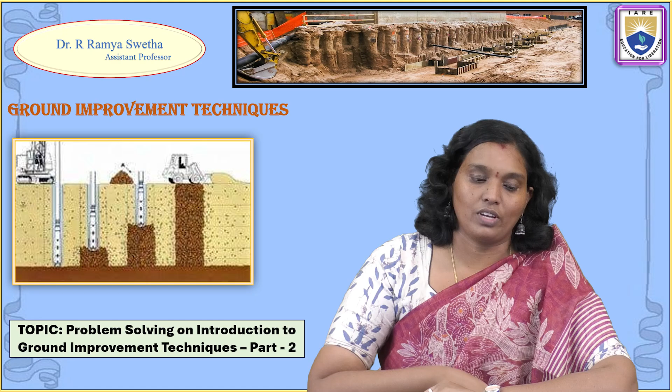Today we are going to discuss what we understood in our previous lecture about various techniques, how to understand the problem statement, and according to that, which method we choose for getting the desired soil property.

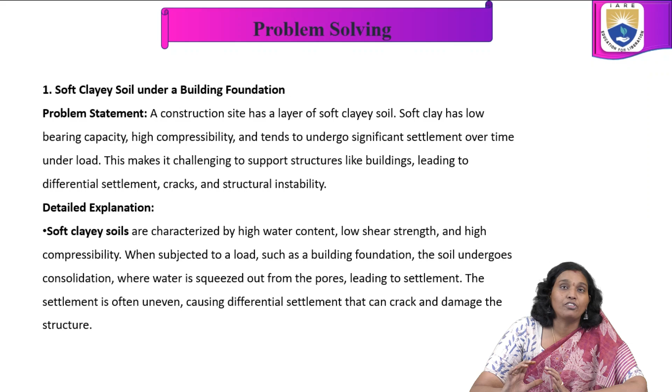In this class, we are going to understand soft clayey soil under a building foundation. The required construction work is a building foundation, and our type of soil is soft clayey soil.

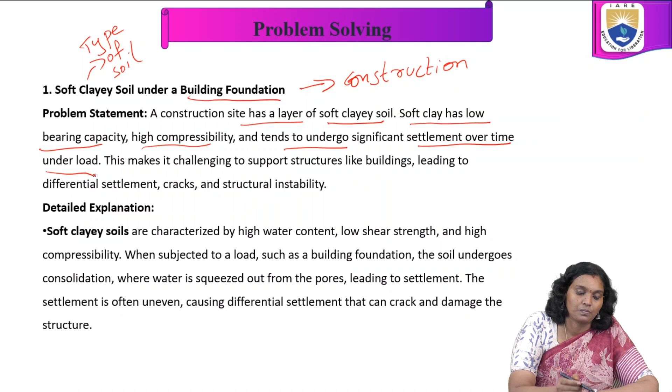The problem statement is a construction site has a layer of soft clayey soil. Soft clay has low bearing capacity, high compressibility, and tends to undergo significant settlement over time under load. This makes it challenging to support structures like buildings, leading to differential settlement, cracks, and structural instability.

Because of this nature of the soil, we are not getting the desired soil properties. In this particular condition, the desired properties are bearing capacity, compressibility, settlement, and structural stability. These are the parameters affecting the building foundation.

For getting the building foundation safe and economical, we have to choose one technique to meet the required properties: bearing capacity, high compressibility. These soils tend to show significant settlement over time under load.

So it is challenging to support structures like buildings. They lead to differential settlement, cracks and structural instability. Here we will explain in detail how to overcome those things.

Soft clayey soils are characterized by high water content, low shear strength, and high compressibility. When subjected to load such as a building foundation, the soil undergoes consolidation where water is squeezed out from the pores, leading to settlement. This settlement is often uneven, causing differential settlement that can crack and damage structures, because of the nature of the soil.

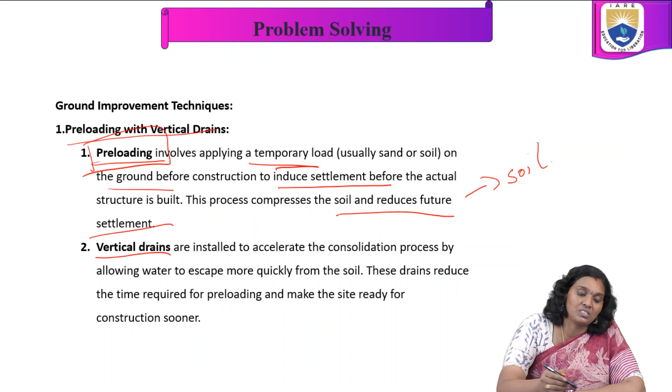This process compresses the soil and reduces future settlement. This preloading helps us reduce the further settlement of the particular soil. Because of this, we choose this preloading with vertical drains technique.

Vertical drains are installed to accelerate the consolidation process by allowing water to escape more quickly from the soil. These drains reduce the time required for preloading and make the site ready for construction sooner. Otherwise it may take a long time to get the desired property.

In that case, we choose these vertical drains to accelerate the consolidation process, allowing water to escape more quickly, so the site is ready as early as possible. Stone columns are also a technique we may choose.

In the problem statement, there are different types of problems we face which we need to rectify. According to ground improvement techniques, various options are there: one is preloading with vertical drains, and the other is stone columns.

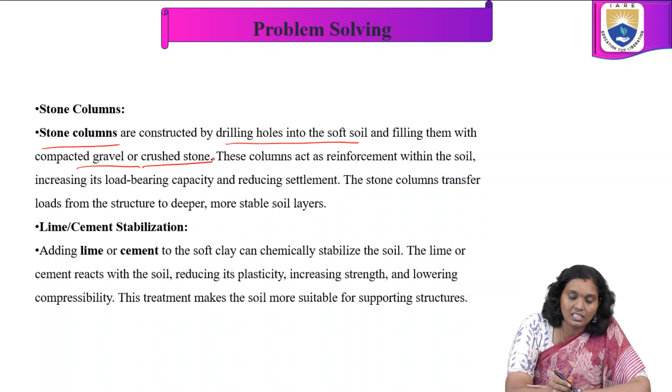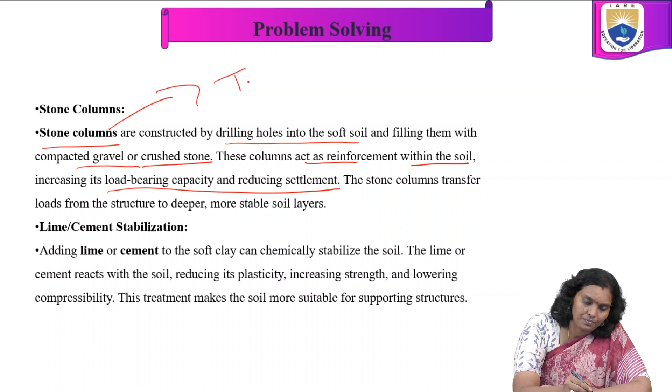Stone columns are constructed by drilling holes into the soft soil and filling them with compacted gravel or crushed stone. These columns act as reinforcement within the soil, increasing its load bearing capacity and reducing the settlement. Using this technique gets the desired properties, increasing load bearing capacity and reducing settlement.

The stone columns transfer loads from the structure to deeper, more stable soil layers.

Lime and cement stabilization is another technique which may be chosen for this kind of problem statement. Adding lime or cement depends upon the properties of the soil, how it reacts with lime and how it reacts with cement. These are the things for stabilization.

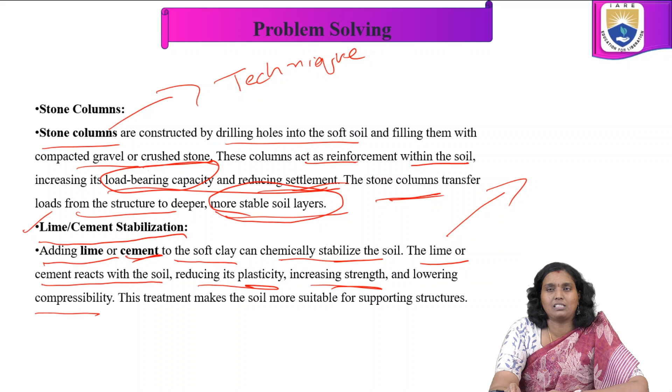So, to chemically stabilize the soft clay soil, the lime or cement reacts with the soil, reducing its plasticity, increasing strength, and lowering compressibility. Once we require these properties, we choose the lime cement stabilization technique to reduce plasticity, increase strength, and lower compressibility.

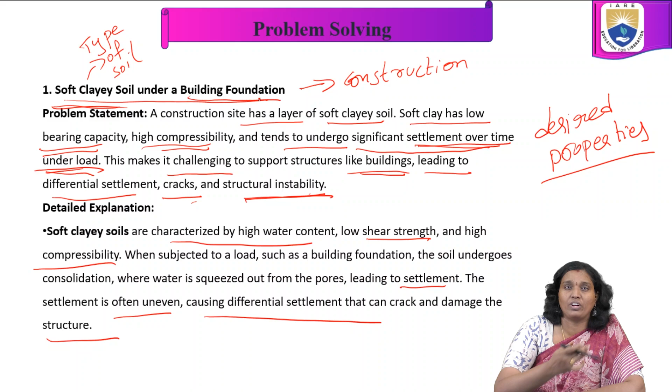So in loose sandy soil there's the issue of liquefaction. For soft clayey soil under building foundation, the available techniques are preloading with vertical drains, stone columns, and lime cement stabilization. As per the numerical analysis and desired property required, if we want reduced plasticity, we choose accordingly, as well as considering site requirement, cost, and effectiveness.

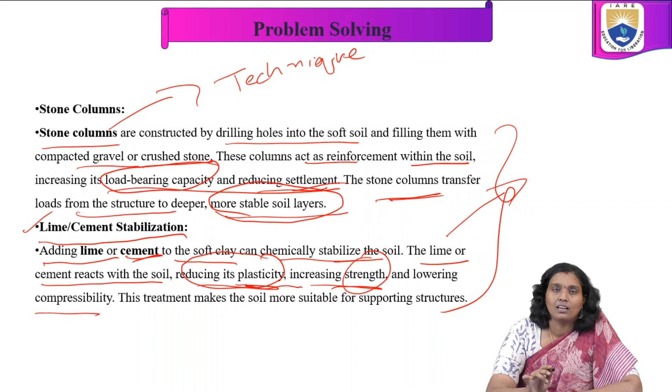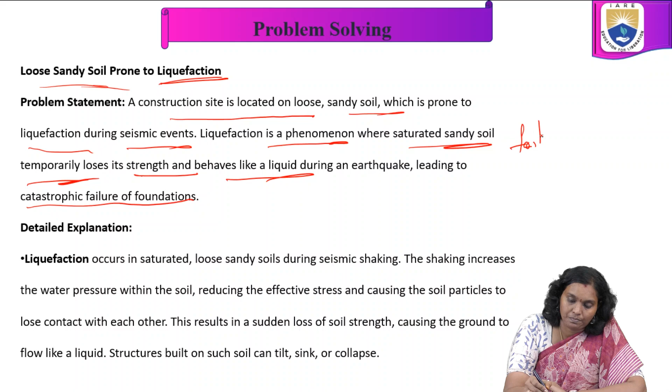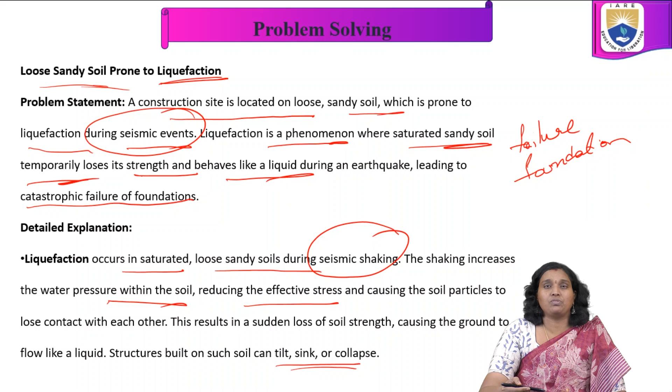So because of this liquefaction nature, we understand this occurs during seismic events. What is liquefaction? It occurs in saturated, loose and sandy soils whenever seismic shaking happens. The shaking increases the water pressure within the soil, reducing the effective stress and causing soil particles to lose contact with each other. This results in sudden loss of soil strength, causing the ground to flow like a liquid. Structures built on such soil can tilt, sink, or collapse.

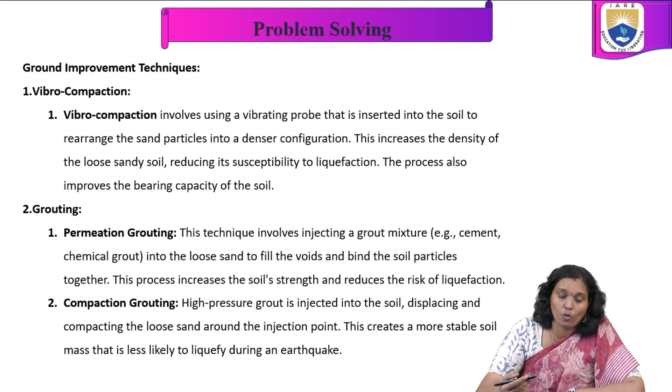So these are the issues we face for loose sandy soils whenever seismic events occur. For this, we have different techniques: vibrocompaction, grouting, and soil replacement are the methods adopted for reducing this problem. In vibrocompaction, it involves using a vibrating probe inserted into the soil to rearrange the sand particles into a denser configuration. This increases the density of the loose sandy soil, reducing its susceptibility to liquefaction.

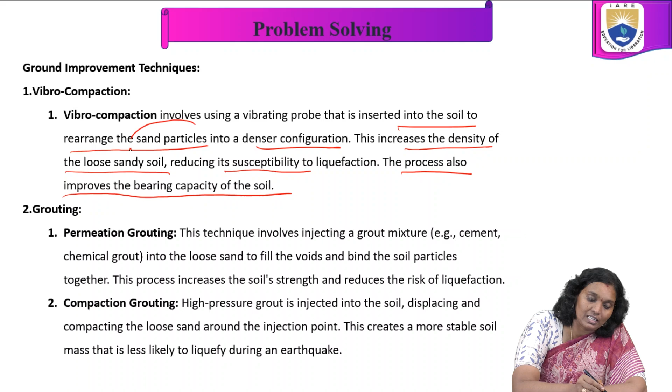So here we understand in vibrocompaction, the vibrating probe is inserted into the soil to rearrange the sand particles to get a denser configuration. This increases the density of the loose sandy soil, reducing its susceptibility to liquefaction. This process also improves the bearing capacity of the soil.

Bearing capacity. Now grouting, permeation grouting. This technique involves injecting a grout mixture, for example cement or chemical grout, into the loose sand to fill the voids and bind the soil particles together, depending on the choice of grout mixture, whether cement or some chemical grout, which we inject.

The process has different methods. According to the type of material we choose and the requirement, we select the injecting technique used into the loose sand to fill these voids and bind the soil particles together. This process increases the soil strength and reduces the risk of liquefaction.

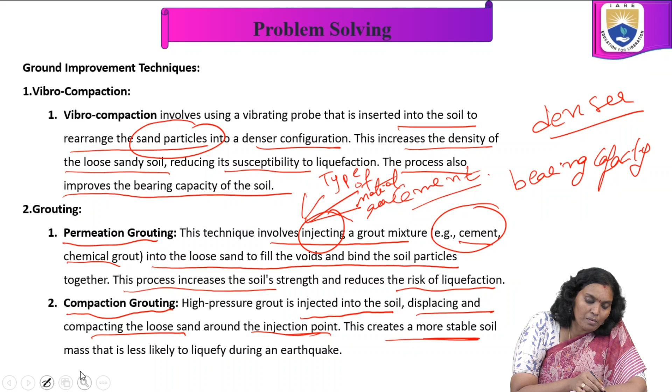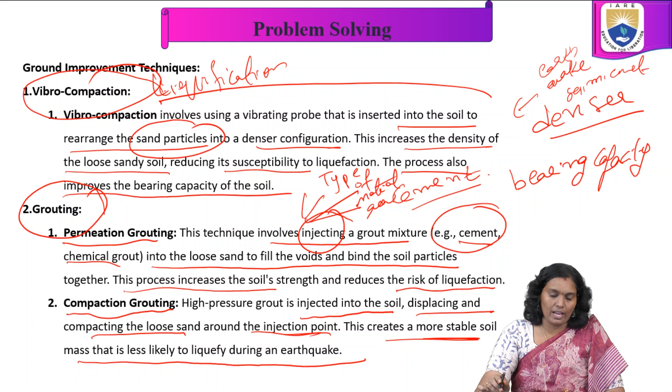Here one more is compaction grouting. In this, high pressure grout is injected into the soil, displacing and compacting the loose sand around the injection point. This creates a more stable soil mass that is less likely to liquefy during an earthquake. As per the earthquake, whenever we experience this, because of seismic events, this liquefaction may happen, so we choose vibrocompaction or grouting or other methods because a more stable soil is created during the earthquake.

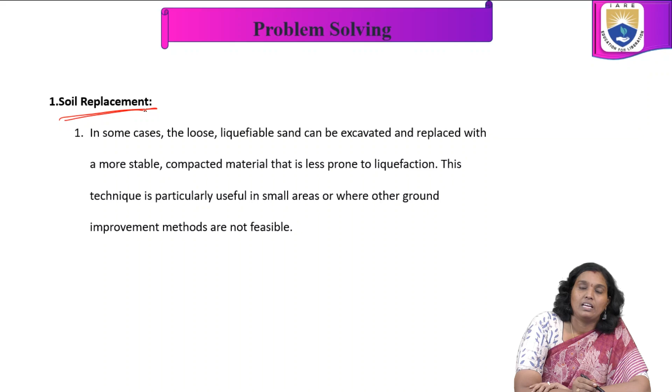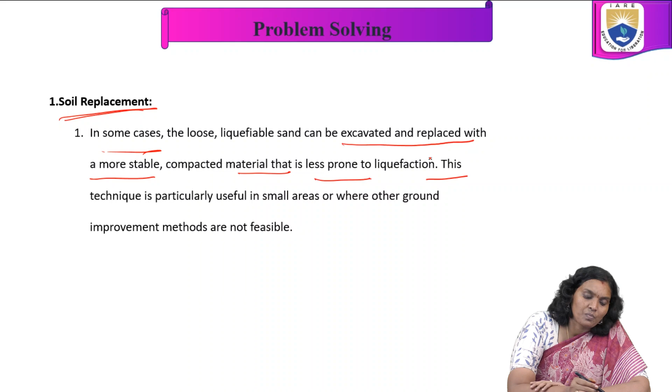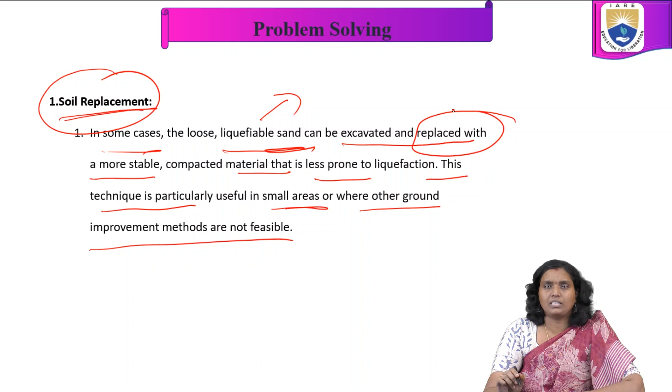Here one more method we may choose is soil replacement. In some cases, the loose liquefiable sand can be excavated and replaced with a more stable, compacted material that is less prone to liquefaction. This technique is particularly useful in small areas where other ground improvement methods are not feasible, so we replace the complete soil.

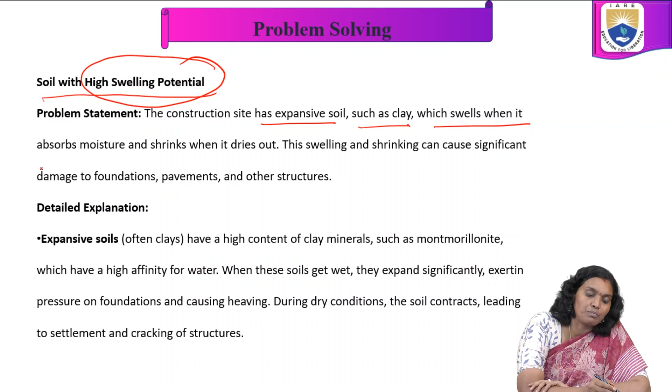One more problem is soil with high swelling potential. The construction site has expansive soil such as clay, which swells when it absorbs moisture and shrinks when it dries out. This swelling and shrinking can cause significant damage to foundations, pavements, and other structures. Expansive soils, often clays, have a high content of clay minerals with high affinity for water. When these soils get wet, they expand significantly, exerting pressure on foundations and causing heaving. During dry conditions, the soil contracts, leading to settlement and cracking of the structure. These are the kinds of problems we may observe in our ground improvement techniques.

So using various techniques—chemical stabilization, soil replacement, moisture content control—for this problematic soil, for doing any kind of project, these are the things we are going to understand. These are the three important techniques we may choose according to the requirement of that project.

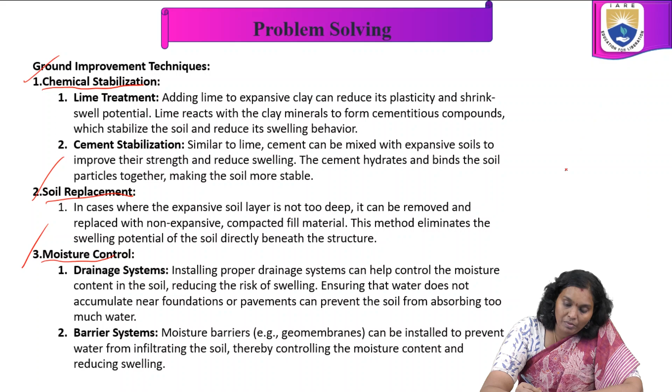In chemical stabilization, we are using admixtures or chemicals according to the requirement of the properties. Adding lime to expansive clay can reduce its plasticity and shrink-swell potential. Once we add the admixture, it reduces the expansive soil's nature, which, whenever it is wet, is going to shrink.

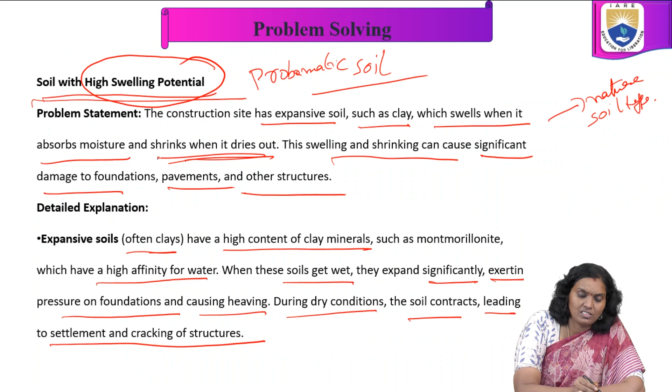Whenever it dries out, and when it absorbs water, it swells—such kind of behavior. This lime reacts with the clay minerals to form cementitious compounds, which stabilize the soil and reduce its swelling behavior.

In cement stabilization, similar to lime, cement can be mixed with expansive soils to improve their strength and reduce swelling. The cement hydrates and binds the soil particles together, making the soil more stable.

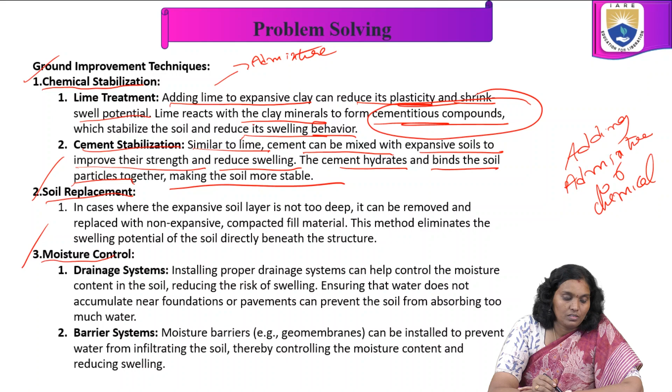There are no all-possible ways to choose chemical stabilization alone, so we may use soil replacement also in some cases. In soil replacement, where the expansive soil layer is not too deep, it can be removed and replaced with non-expansive compacted fill material. This method eliminates the swelling potential of the soil directly beneath the structure.

One more technique for this problem statement is moisture control, which may be based on drainage systems or barrier systems, depending on the situation. Installing a proper drainage system can help control the moisture content in the soil, reducing the risk of swelling, and ensuring that water does not accumulate near foundations or pavements can prevent the soil from absorbing too much water.

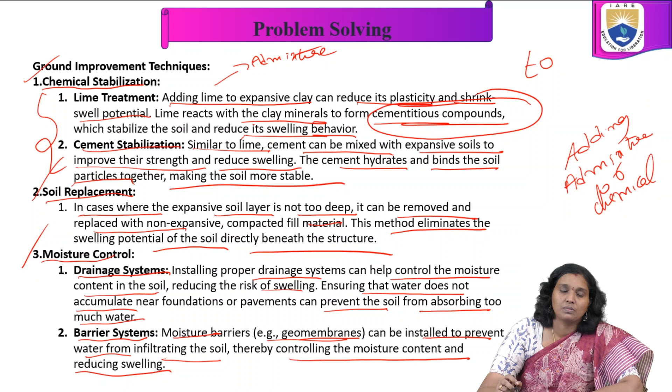In barrier systems, moisture barriers, for example geomembranes, can be installed to prevent water from infiltrating the soil, thereby controlling the moisture content and reducing swelling. These are the things we are going to understand in this particular problematic soil. So according to the requirement and possible conditions, we are going to choose among the techniques.

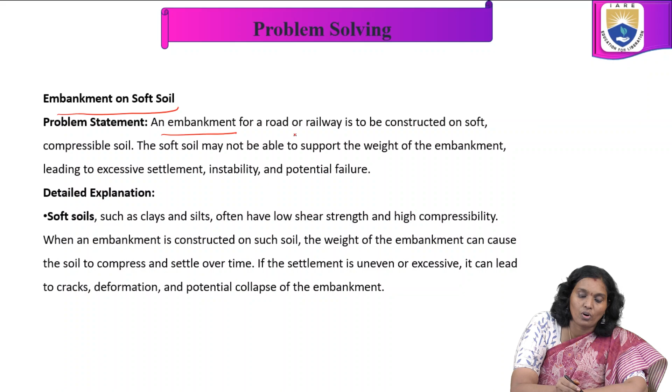Embankment on soft soil: in this kind of problematic soil, an embankment for a road or railway is to be constructed on soft compressible soil. The soft soil may not be able to support the weight of the embankment, leading to excessive settlement, instability and potential failure.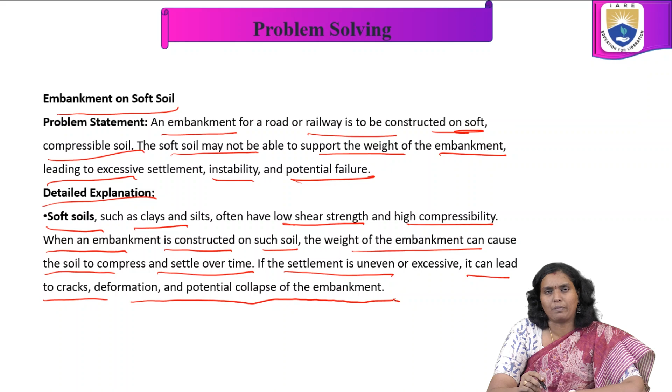In detail, soft soils such as clays and silts often have lower shear strength and high compressibility. When an embankment is constructed on such soil, the weight of the embankment can cause the soil to compress and settle over time. If settlement is uneven or excessive, it can lead to cracks, deformation and potential collapse of the embankment. So for this kind of problem statement, we have different techniques we may choose.

Those are geotextiles and geogrids, prefabricated vertical drains (PVDs), controlled modulus columns, and preloading with surcharge. These techniques may be chosen for this kind of problem statement.

Geotextiles are permeable fabrics placed between the soft soil and the embankment fill material. They help distribute the load more evenly, prevent mixing of soil with the fill, and improve stability. Geogrids are similar to geotextiles but have a grid-like structure; they provide reinforcement by interlocking with the soil and fill material, enhancing the overall stability of the embankment.

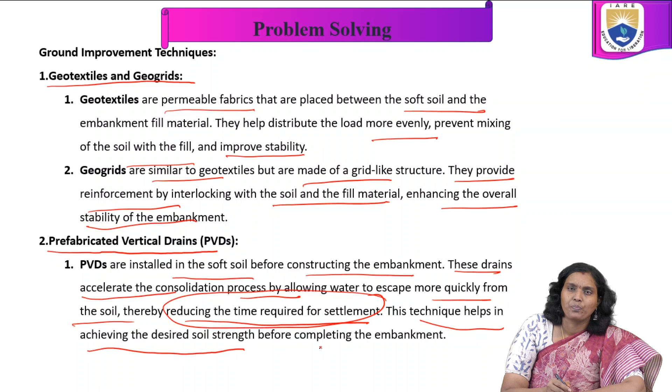PVDs are installed in the soft soil before constructing the embankment. These drains accelerate the consolidation process by allowing water to escape more quickly from the soil, thereby reducing the time required for settlement. This technique helps in achieving the desired soil strength before completing the embankment.

In controlled modulus columns, CMCs are rigid inclusions installed into the soft soil to improve its load-bearing capacity. The columns are constructed using a displacement auger that creates a void in the soil, which is then filled with a cementitious material. The CMCs transfer the load from the embankment to deeper, more stable soil layers, reducing settlement and increasing stability.

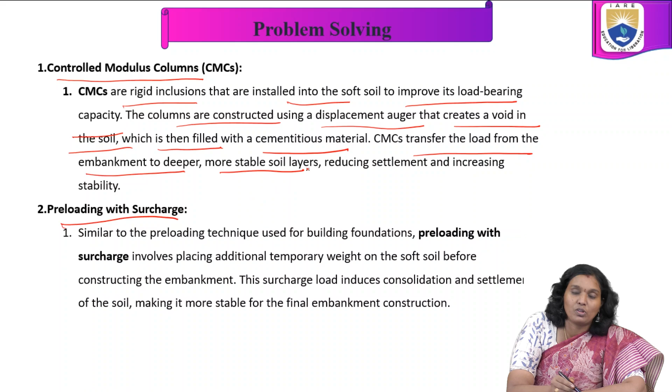In preloading with surcharge, similar to the preloading technique used for building foundations, this involves placing additional temporary weight on the soft soil before constructing the embankment. This surcharge load induces consolidation and settlement of the soil, making it more stable for the final embankment construction.

As per the requirement, parameters, safety and economy of the project, we are going to choose the technique for this kind of problem statement. These are some of the things we are going to understand in this particular module.

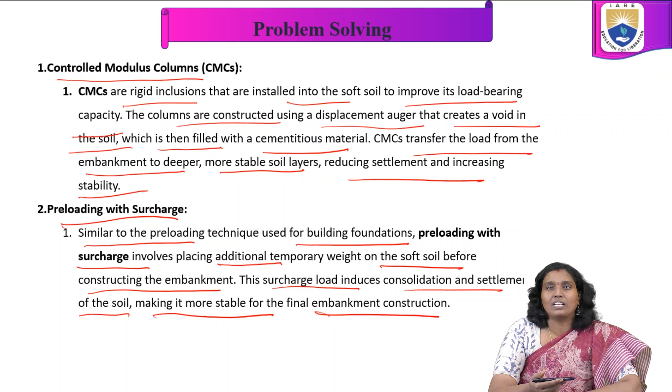We will see more of these things in our next lecture.